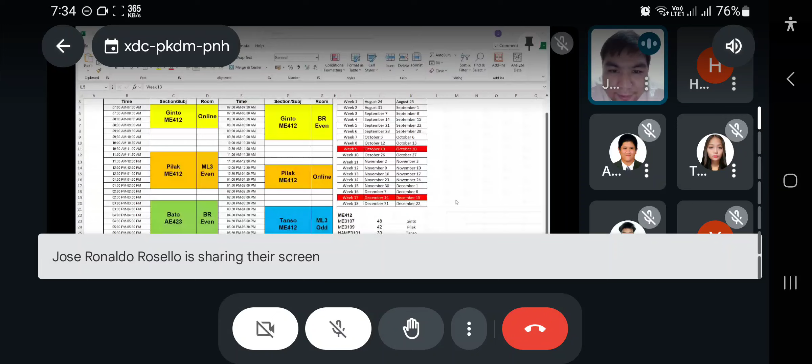Papakita ko sa inyo yung calendar ha. Ito yung plan natin. So, tatapos yung ating midterm nitong week ng 9. Pero hindi naman tayo nagklase ng 19-20. October 19 kasi nasa convention ako. October 20, sir, pahinga naman muna. Okay, 26, nag-discuss ako ng midterm sagot.

Anong ginawa pa natin? Yung design project na discussion kung paano gagawin. Then, October 27, naggawa tayo ng CAMS. Nag-discuss pa ng CAMS. So, November 2, hindi din tayo nakapag-klase. Tapos, November 3 ngayon.

Ngayon, tutuloy lang natin yung lecture nung sa CAM, kung paano mag-drawing ng CAM using graphical method. Tapos, sa November 9 is paano mag-drawing ng CAM using analytical method. So, mas mahirap itong 9, pero kaya na yun. Then sa 10 is design plate number 3 na tayo. So November 10, design plate number 3.

Then 16 saka 17 is discussion naman tayo ng gears. Tapos 23 gears pa din. Then 24 is design plate number 4 naman. Kung magdodrawing naman tayo ng gears. So, meron na tayong schedule.

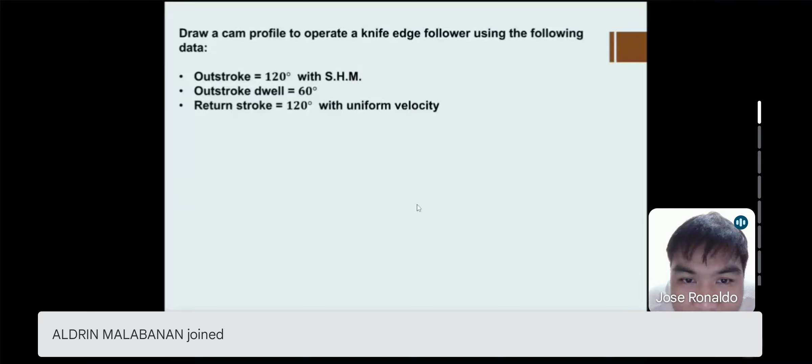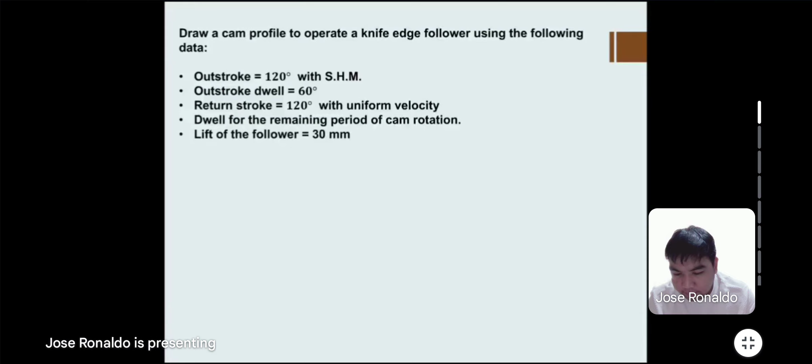Now, this second item and this fourth item, which is dwell for the remaining period of cam rotation - so what is the remaining period? We have the outstroke, which is 120 degrees, then the outstroke dwell is 60. So if you add it, you have 180, meaning we already have 180 degrees of cam rotation. Then if we add the return stroke, which is 120 also, we will have 300 degrees. So the remaining cam rotation is 60 degrees, meaning the remaining 60 degrees is how long it will dwell before it starts with the outstroke again.

So you will see again in the video later. When we say lift of the follower is 30 mm, this is the height on which the follower displaces, so this is the highest point that it will reach. Meaning, it would take 120 degrees of rotation for outstroke to reach the lift of 30 mm. Then it will take 120 degrees of return stroke to return the 30 mm going back to zero.

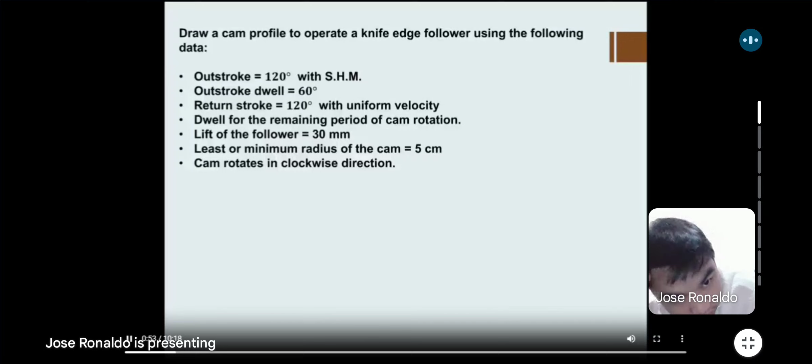Now, first we'll see how to draw the displacement diagram in this particular case. Then we'll actually construct it, and then we'll see with the help of animation how to actually construct it so that you can easily understand the given procedure.

He is calling the graph the displacement diagram, but it's the same thing as the cam displacement curve. So they're the same, it's just a different name.

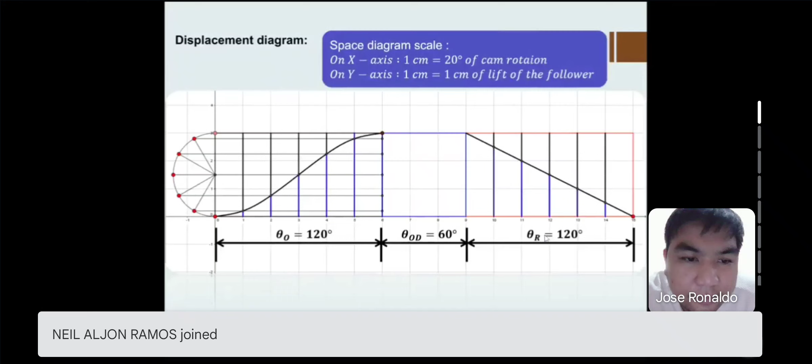Now here we have taken the space diagram scale. So on x-axis 1 centimeter is 20 degree of the cam rotation. So you can see over here the outstroke, as we have seen, it is 120. So 120 divided by this 20, it is 6 centimeter. So this particular length will be of 6 centimeter, and we have divided that into 6 equal parts.

Then the next is outstroke dwell, that is 60 degrees. So 60 again divided by this 20, that is 3 centimeter. So this length will be for 3 centimeter, as you can see over here. Similarly, this return stroke is of 120 degree. So it is 120 divided by this 20, that is 6 centimeter.

Then as this outstroke is with simple harmonic motion, we have constructed this semicircle over here, and we have divided it into 6 equal parts.

Now from point 1, draw the horizontal line. Once we have divided the semicircle into parts, we'll just make a straight line parallel to the x-axis, and the starting point is this, numbers 1, 2, 3, 4, 5, 6. From point 2 also draw the horizontal line, so that it will intersect this second line over here. From point 3 draw the horizontal line, so that it can intersect over here at this particular point, and name those particular parts.

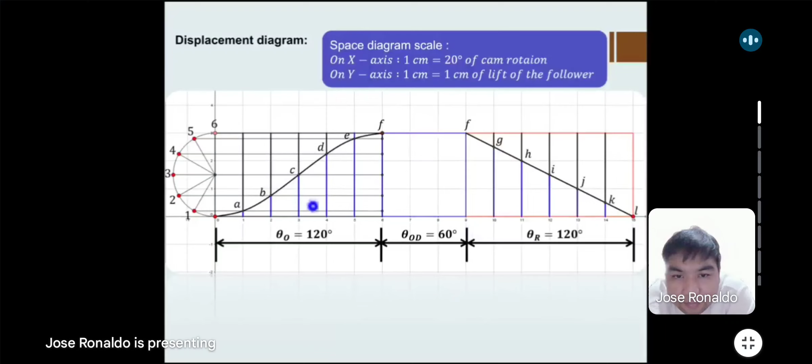Then once we measure these distances, we will transfer it to the base circle. All these distances are important for us, not only for this outstroke but also for the return stroke. Now we'll see this particular construction with the help of animation.

One more thing, that on the y-axis we are having the scale as 1 centimeter is equal to 1 centimeter of the lift of the follower. Our lift of the follower is 30 mm, that is 3 centimeter. So this vertical distance will be of 3 centimeter.

Now let us see how to construct this particular displacement diagram. We'll see the entire construction also afterwards in full animation form.

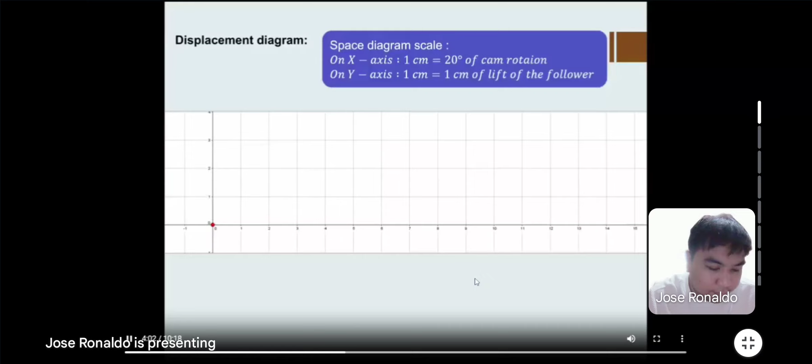As explained earlier, we are drawing this displacement diagram. This is the animation part on how it arrived, how the displacement or cam displacement curve was made. Dividing the semicircle, then drawing the vertical lines, then horizontal lines from the given particular part, and then a smooth curve passing through those intersection points of A, B, C, etc.

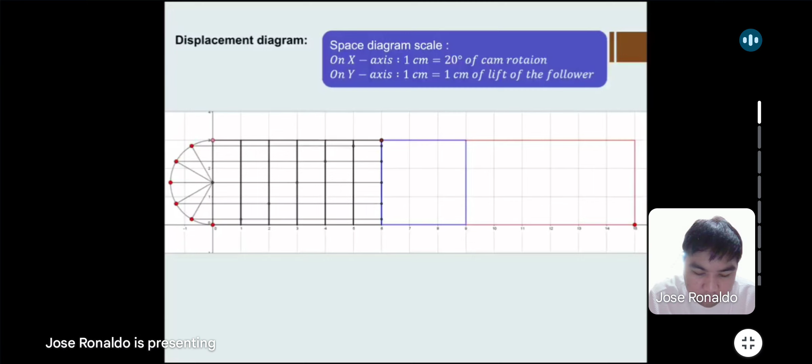Similarly, in case of the return stroke also, we'll get this type of construction. This we have already seen.

Now let us see how to draw the base circle, then once we have drawn the cam displacement curve, we will now draw this particular cam profile. We know that the least radius of the cam is 5 centimeters, so we have drawn this circle of 5 centimeters.

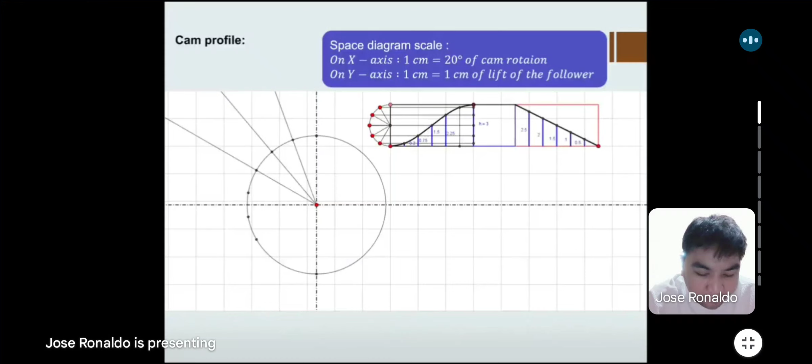Then outstroke is 120 degrees. Divide this circle into 6 equal parts as shown over here. Then, since it is given that the outstroke is 120 degrees, the starting point of the cam is the top part.

Since it is given that the outstroke is 120 degrees, starting from the starting point of the cam, we will measure 120 degrees. So this is the 120 degrees, the given drawing here.

Then, since we have divided the outstroke into six parts, we will also divide this 120 degrees into six parts during the outstroke. Then there is a dwell period. Then again divide the return stroke into 6 equal parts and draw these lines passing through this.

Now, as you can see over here, these are the distances which we have measured: 0.75, 1.5, 2.25. Those we are transferring over here on these lines, and then we are drawing a smooth curve passing through these particular points.

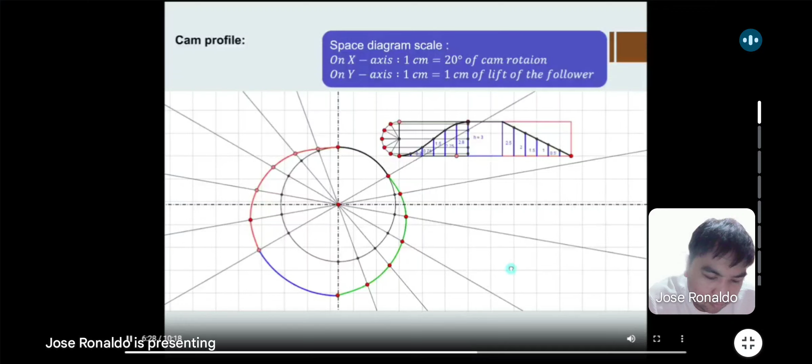Now we'll see how actually we'll draw this particular diagram. So let us start with our actual drawing of the cam profile. This is just another animation on how to draw it.

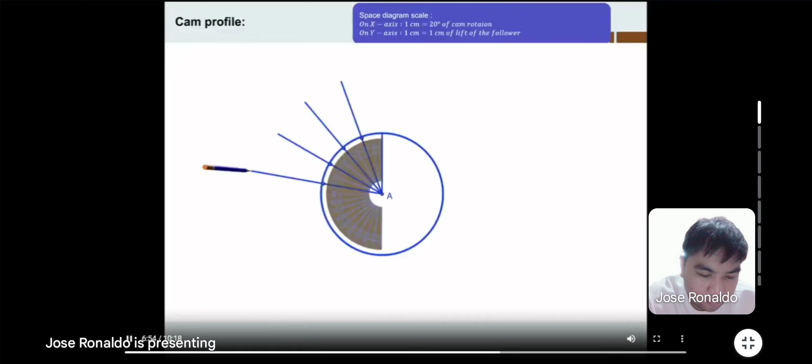As the outstroke is of 120 degrees, divide it into 6 equal parts. So we are dividing this outstroke of 120 into 6 equal parts. Then there is a dwell for 60 degrees. Again, divide the return stroke into 6 equal parts.

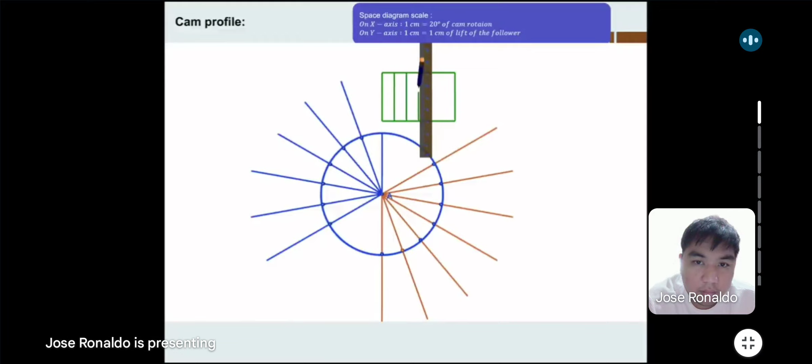Now we'll draw the displacement diagram also simultaneously over here, which we have already seen how to draw and how to measure the distances, and those distances will transfer on these particular lines. First, we'll start with the outstroke, as you can see over here.

As the outstroke is with simple harmonic motion, we'll draw the semicircle, then divide that particular semicircle into 6 equal parts -- 180 divided by 6, so 30-degree angle we have taken, so that we can divide that circle into 6 equal parts. Then locate these particular points on our semicircle.

Join this with the center. Now transfer these points on the corresponding vertical lines which we have drawn, and draw a smooth curve—that is the simple harmonic motion.

Now take the points marked on our circle and transfer the given particular distances, as you can see over here, onto those lines.

So we are marking these points of intersection with the line of this arc. This is our cam profile during the outstroke. There is a dwell for the remaining degrees.

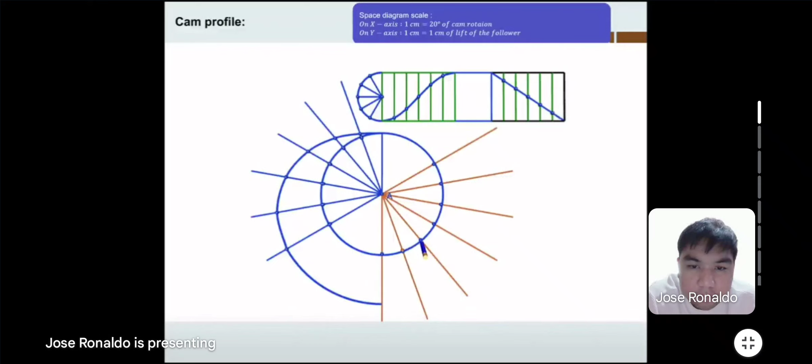So we are just marking the points on our circle. Now transfer these distances. Mark the points of intersection of this arc with these blue lines, and then draw the curve.

So this is our complete cam profile. Thank you very much for watching.

Okay, so that's how we draw the cam profile using the graphical method. I have another video here, so let's watch again.

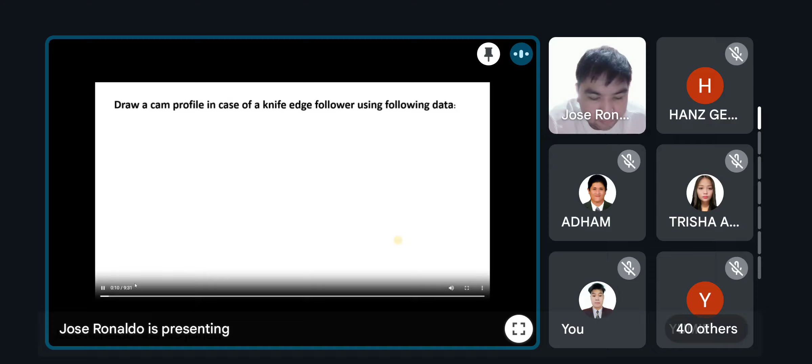To draw the cam profile, we have to draw a cam profile in case of a knife edge follower using the following data. Minimum radius of the cam is 5 centimeters. Outstroke is 120 degrees with simple harmonic motion. Outward dwell is 60 degrees. Return stroke is 120 degrees with simple harmonic motion, and dwell for the remaining period of cam rotation. Stroke or lift of the follower is given as 6 centimeters.

So the data is written over here: outstroke is 120, outstroke dwell is 60 degrees, return stroke is 120 degrees, and the remaining angle will be the return dwell, that is 360 minus the rest.

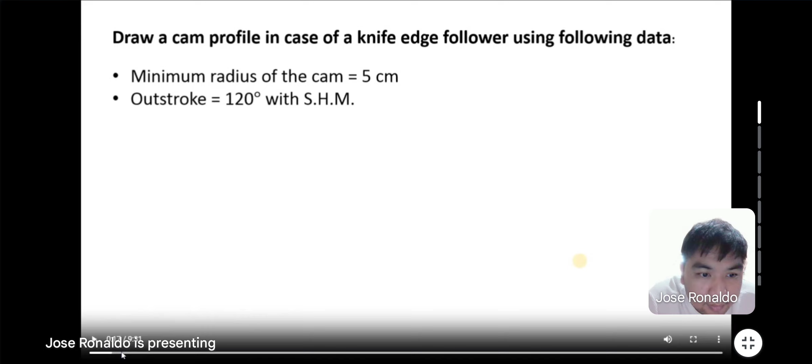So here the given data is changed a bit. For this one, we have the outstroke still 120 with simple harmonic motion, but the return stroke is also simple harmonic motion. So this is a similar case to the other one—it's just the outstroke that is different.

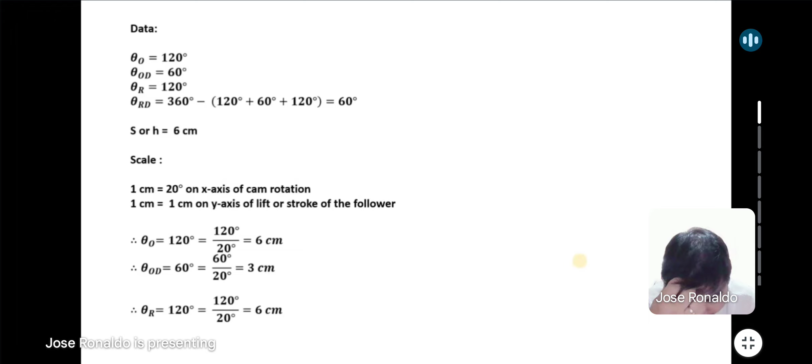Harmonic motion, and dwell for the remaining period of cam rotation. Stroke or lift of the follower is given as 6 centimeters. So the data is written over here: outstroke is 120, outstroke dwell is 60 degrees, return stroke is 120 degrees, and the remaining angle will be the return dwell, that is 360 minus the summation of these three angles—120 plus 60 plus 120—so that will be nothing but 60 degrees.

This S or H is the lift—it's just a different name again. We can use S as a replacement for displacement, or H as the height of displacement. Lift or stroke of the follower is given as 6 centimeters, and minimum radius of the cam is given as 5 centimeters.

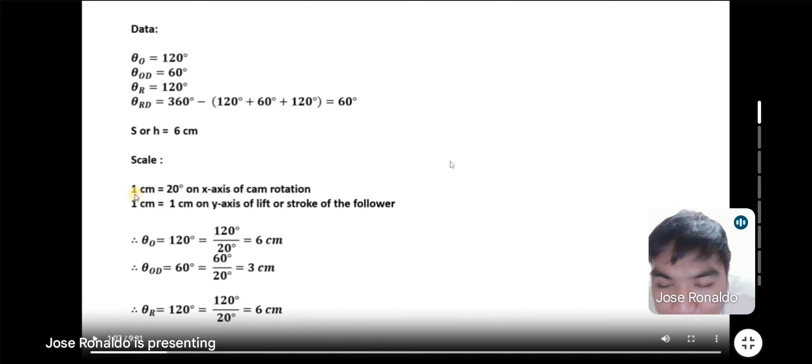Now the important part is to select the scale over here. Again, for the scale to represent the 120 degrees of outstroke, the outstroke dwell, and the return stroke, here for every 20 degrees there is 1 centimeter. This is not a fixed rule, so we can change the scale we want, but it is easier to use this one: 1 centimeter equals 20 degrees on the x-axis of cam rotation, and 1 centimeter equals 1 centimeter on the y-axis of lift or stroke of the follower.

So outstroke is equal to 120 degrees. 120 divided by the scale we have chosen, 20 degrees, gives 6 centimeters. Similarly, theta OD is equal to 60, so 60 divided by 20 degrees is 3 centimeters. And theta R, the return stroke angle, is 120 divided by 20, that is 6 centimeters. So on our displacement diagram, we represent these three angles as 6 centimeters, 3 centimeters, and 6 centimeters.

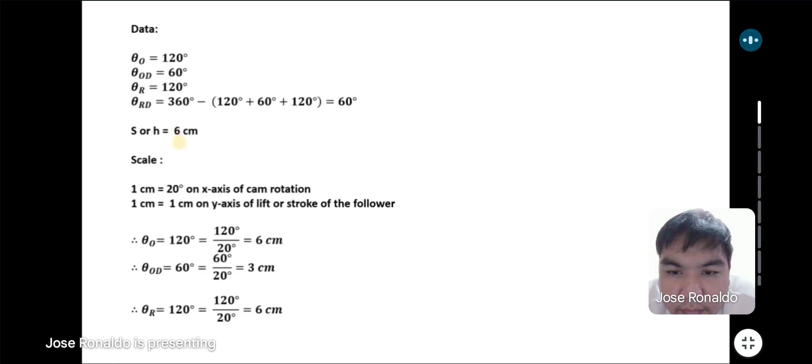Similarly, on the y-axis, 1 centimeter equals 1 centimeter. So on the y-axis, the 6 centimeter stroke will be represented by the original length of 6 centimeters. So let us first draw the displacement diagram for this.

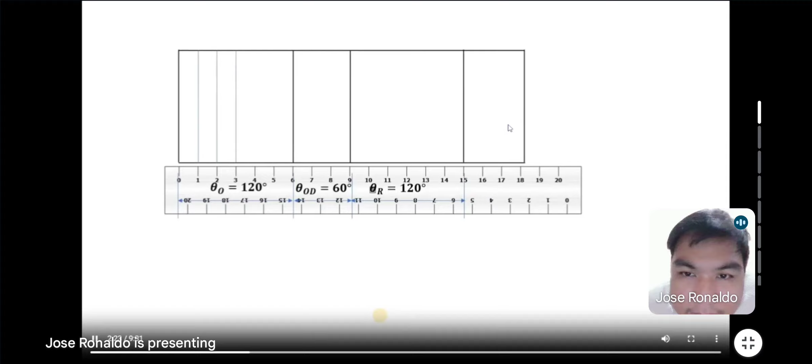Again, using the scale, we can draw the displacement diagram or the cam displacement curve. For every 1 centimeter, we have 20 degrees of rotation. The difference here is that the drawing also includes the return dwell—it is not required, but it is included anyway. So on the right side, we consider the 6 centimeter length for the outstroke, then the 3 centimeter length for the outstroke dwell, and then the 6 centimeter length for the return stroke.

So outstroke is 120 degrees, and by scale it is 6 centimeters on our displacement diagram. Outstroke dwell is 60 degrees, which is 3 centimeters on our displacement diagram. Return stroke is 120, divided by 20, that is 6 centimeters on our displacement diagram. We are not considering the return dwell part over here.

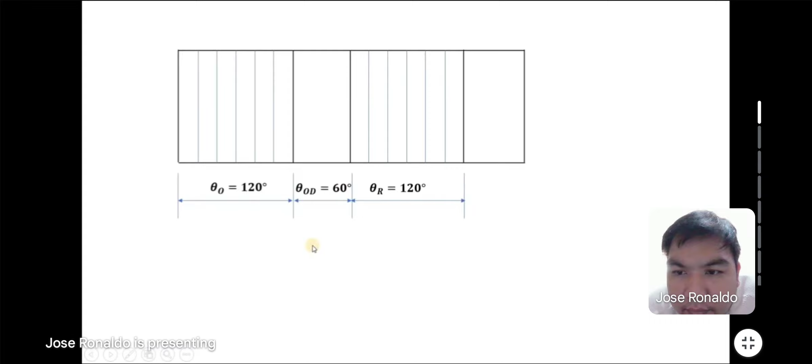We are concentrating only on these three angles for drawing the displacement diagram. Now we'll draw the center line. Since it is simple harmonic motion, we'll divide this semicircle into six equal parts, so 180 divided by 6 is 30 degrees. We have marked the angles. For simple harmonic motion, we divide the semicircle into parts, so if we divide it into 6 parts, the displacement diagram should also be divided into 6 parts.

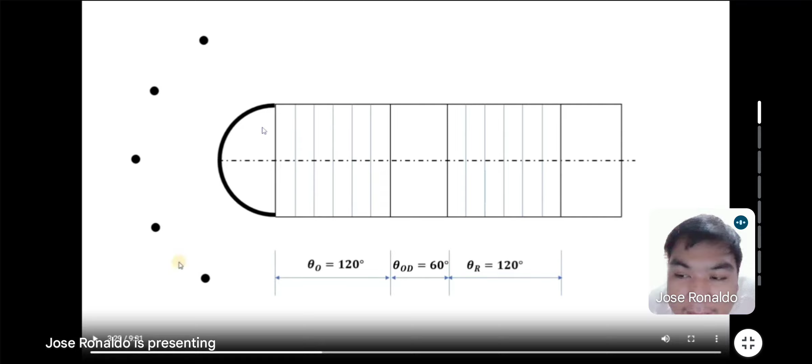Now draw the lines passing through this, then mark this 1, 2, 3, 4, 5, and 6. Draw the horizontal line from this one till it intersects this vertical line from 1 at this particular point. Similarly, draw a horizontal line from 2 till it intersects this vertical line from 2 at this particular point. Same procedure we have to draw for line from 3 till it intersects this vertical line from 3 and so on.

Now we have to join these points by a smooth curve. So this is the simple harmonic motion curve that we have obtained for theta O equal to 120 degrees.

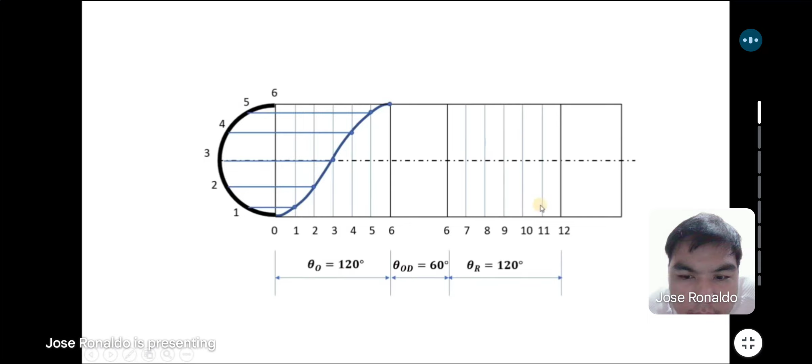Now, as both the outstroke and return stroke are simple harmonic motion, we can translate these points on the return side also. So as you can see over here, since the return stroke is also simple harmonic motion, we are just copying the points to the return stroke coming from the outstroke. Same points will be there for the return stroke also.

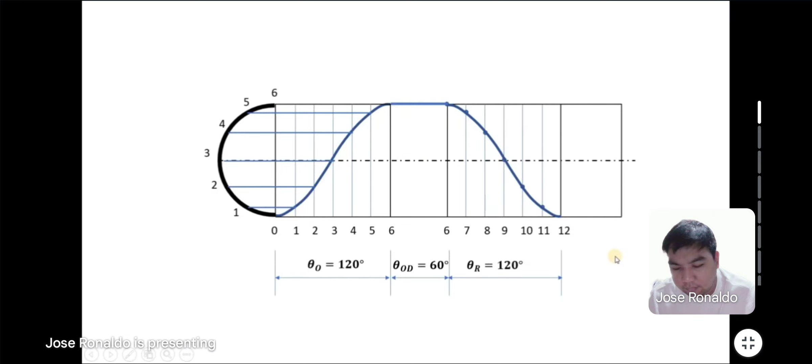And then join a smooth curve from this point. So this is the curve for return stroke, and then this is the dwell. So we have completed the displacement diagram in case of this particular problem.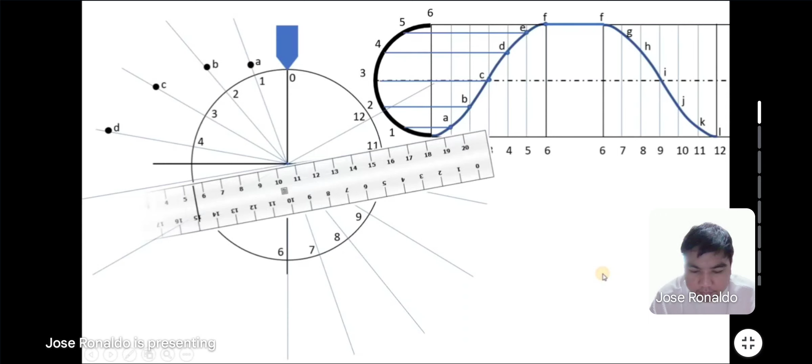Similarly, this 3 and C distance, that is 3 centimeters, we are marking over here. That is 3C distance. Similarly, for 4D, then for 5E, and then for this 6F.

Similarly, this 6F will be drawn on the return stroke lines also. So all these points are drawn. So it is 6F, then 7G, 8H. All these lines 6F, 7G, 8H, these distances are transferred over here on the corresponding lines.

Now we have to draw a smooth curve passing through these points, and that will be our cam profile.

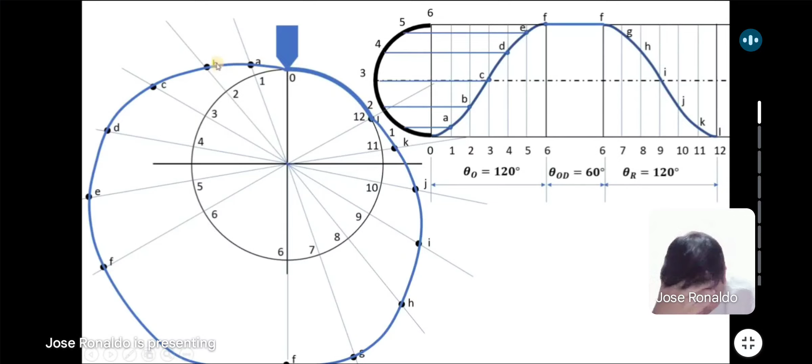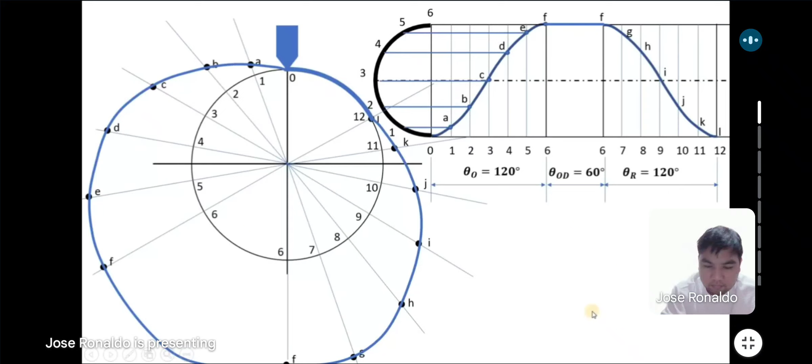Okay, again, so that's the design of the cam profile using simple harmonic motion. That's the easy part, drawing the cam profile when the follower is reciprocating.

So if the follower is oscillating, it is much more challenging than the reciprocating case. For the oscillating part, we have to consider the length of the arm and the distance of the pivot of the oscillating arm. I'll just give you an overview of how to design this, but this is a hard one compared with the others.

In this video, we'll see how to draw a cam profile in the case of an oscillating roller follower. So let us start with the problem statement: we have to draw a cam profile to drive an oscillating roller follower with the following specifications.

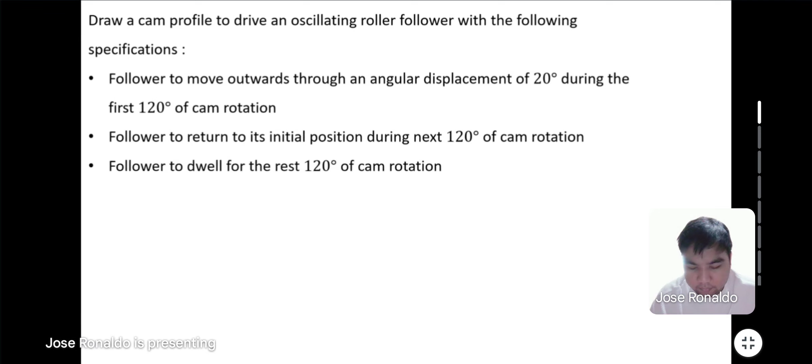Follower to move outward through an angular displacement of 20 degrees during the first 120 degrees of cam rotation. Follower to return to its initial position during the next 120 degrees of cam rotation. Follower to dwell for the rest of the 120 degrees of cam rotation. The distance between the pivot center and roller center is 120 mm. The distance between the pivot center and cam axis is 130 mm. Minimum radius of the cam is 40 mm. Roller radius is 10 mm. Outstroke and instroke both take place with simple harmonic motion.

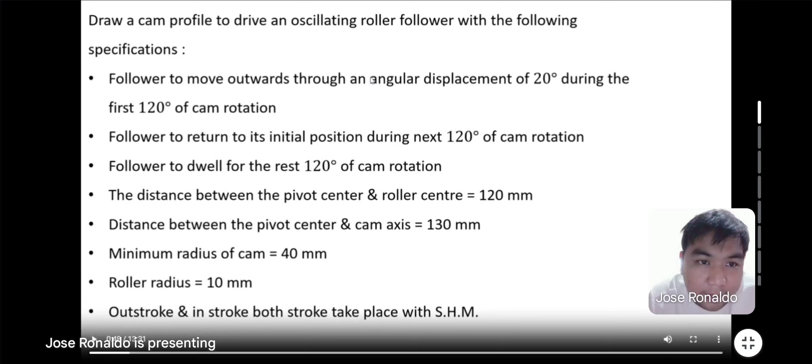Okay, let's analyze the given data first. The follower moves outward through an angular displacement of 20 degrees during the first 120 degrees of cam rotation. Since the follower is oscillating, the given displacement is 20 degrees. Again, an oscillating motion is a back and forth motion on an angle, so the angle it makes is 20 degrees, and it can make this 20 degrees of travel during the 120-degree cam rotation.

Then the follower will return to its position during the next 120 degrees, meaning there is no outstroke dwell. Once it has reached the 120 degrees, it will now return to its original position for the succeeding 120 degrees. Then once it has returned to its original position, it will dwell for the remaining 120 degrees of rotation.

Another given here is the distance between the pivot center and the roller center. Since this is a roller follower, we will have a prime circle. The pivot center is the joint connected to the ground, and this 120 mm is the distance from that joint to the center of the roller. Then the distance between the pivot center and the cam axis - when we say cam axis, it is the center of the base circle - the given distance from the pivot of the follower to the center of the cam is 130 mm.

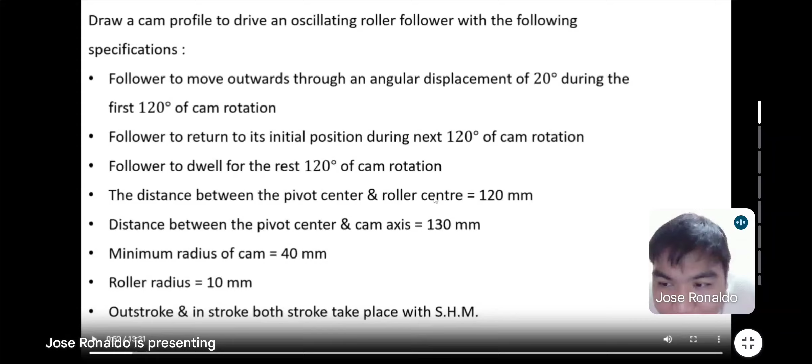Again, the given angle is 20 degrees, and this 20 degrees is the travel of the follower. This arc can be computed using radius times the angle in radians. So 20 degrees in radians times the radius, which is given as 120 mm. Let's convert 20 degrees into radians by multiplying it by pi over 180. Then multiply it with the radius, and we will have the displacement, rounded off to the whole number, which we will use as the y-axis.

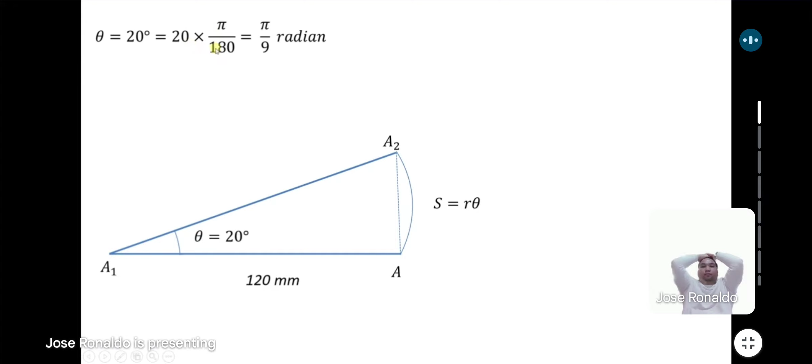Oscillation of the follower is given as 20 degrees, so convert that value into radians. We multiply it by 20 into pi by 180, that is pi by 9 radians. Now A1A2 is the distance between the pivot center and roller center. A2 is the roller center and A1 is the pivot center, and that distance is given as 120 mm, so this is our radius.

Then arc AA2: we know that arc S is equal to r theta. So radius is 120 and theta is pi by 9. After multiplying the radius with the angle in radians, we will have 42 mm. So we will use 42 mm on the cam displacement curve on the y-axis.

I'll repeat this procedure. For an oscillating follower, it is a back and forth motion on an angle, and the given angle is 20 degrees. It is given that the distance between the pivot and the roller center is 120 mm, so we can use this as a radius. To compute the linear displacement S, we multiply the radius or distance between the pivot and roller center by the angle in radians. That's why this 20 degrees is first converted into radian form by multiplying by pi over 180.

Then we multiply this pi over 9 into 120. The answer has a decimal, so we round it into whole numbers, giving 42 mm, which is what we will use on the y-axis for the cam displacement curve. 120 into pi by 9 comes out to be 41.887, or nearly 42 mm. This arc distance will approximately equal the vertical distance, so we can say the lift of the follower is 42 mm when drawing the displacement diagram.

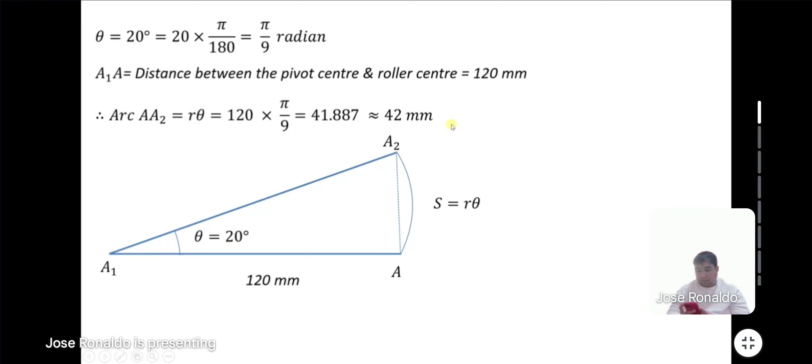Now theta outstroke is given as 120 degrees with simple harmonic motion. Return stroke is also 120 degrees with simple harmonic motion. Then return dwell is also 120 degrees. Minimum radius of the cam is 40 mm, then radius of the roller is 10 mm. Therefore prime circle radius will be equal to 40 plus 10, that is 50 mm. Convert these values into centimeters, so it is 5 centimeters.

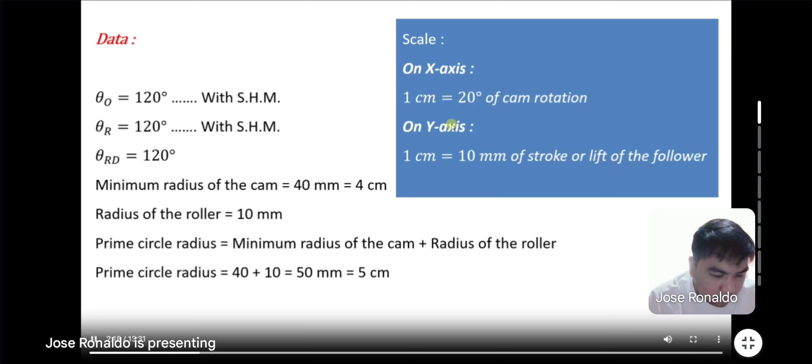Now we'll take into consideration the scale, which is very important. On the x-axis, we have a scale of 1 centimeter equals 20 degrees of cam rotation. Again, this is not a rule, it is just convenient to use this, so we can use it. Then minimum radius of cam is 4 centimeters, which we can use as a base circle, and since we have a roller radius, we will have a prime circle.

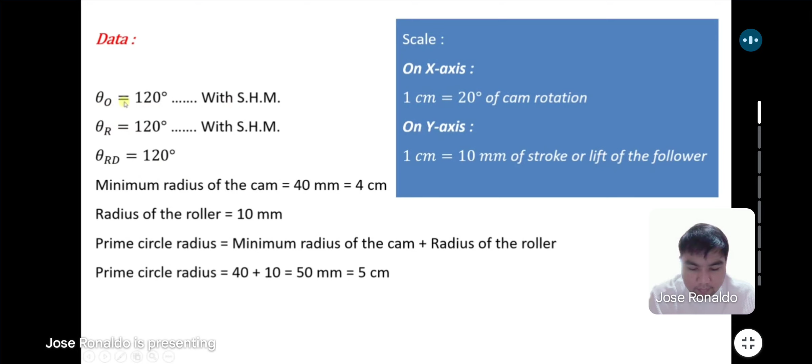On the y-axis, we will take 1 centimeter equals 10 mm of stroke or lift of the follower. So 120 divided by 20 is 6 centimeters, so theta outstroke will be 6 centimeters. Similarly, theta return stroke is also 120 divided by 20, that is 6 centimeters, and theta return dwell is also 6 centimeters. So total will be 18 centimeters, out of which outstroke and return stroke are important for us while drawing the displacement diagram. First we'll mark the length of 18 centimeters, then divide the outstroke and return stroke into 6 equal parts as shown here.

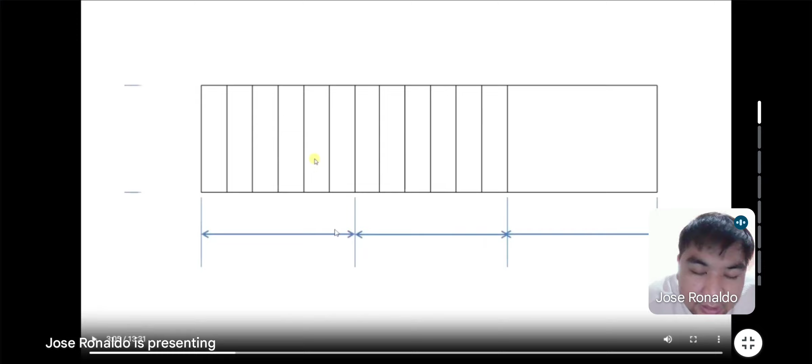So for the cam displacement curve part, since the given is 120 degrees on the outstroke, the representation of that will be 6 centimeters. As you can see, the lift of the follower is 42mm. The earlier computed 42mm will be placed on the y-axis.

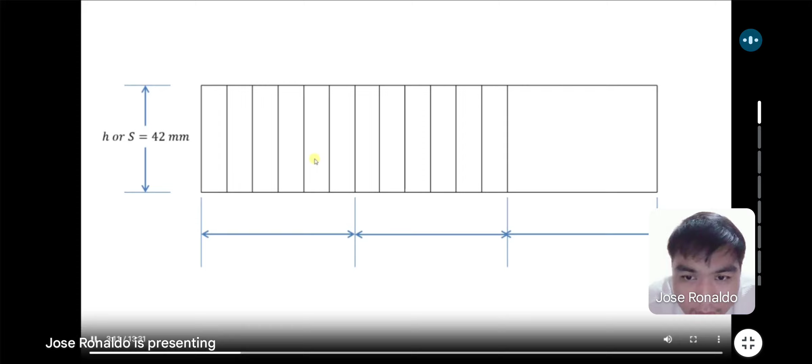For the x-axis, the arc distance which we have approximately converted into vertical displacement using the scale: outstroke of 120 degrees is 6 centimeters, return stroke 120 degrees is also 6 centimeters, and dwell is also 6 centimeters. All of them are 6 centimeters by scale, and we have divided that 6 centimeter into 6 equal parts.

Now since the motion is simple harmonic motion, we'll draw a semicircle. Again, for simple harmonic motion, we will draw the semicircle first, then divide it into parts. Since we have divided the outstroke into 6 parts, we will also divide the semicircle into 6 parts.

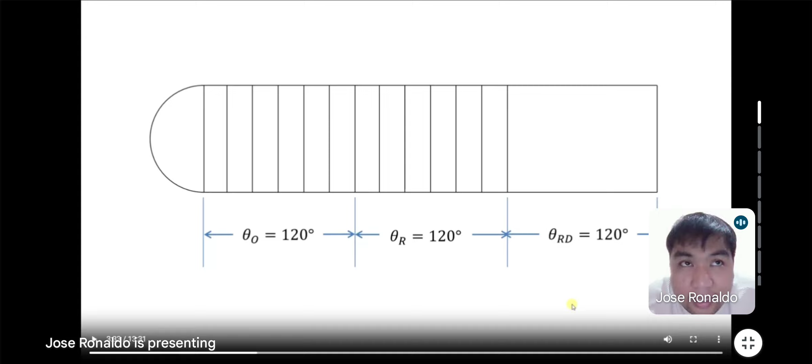For this cam displacement curve, it is not required to draw the return dwell. But for clarity, they have drawn the return dwell here. Technically, we can choose not to draw the return dwell.

Of radius 42 divided by 2, that is 21, that is 2.1 centimeter.

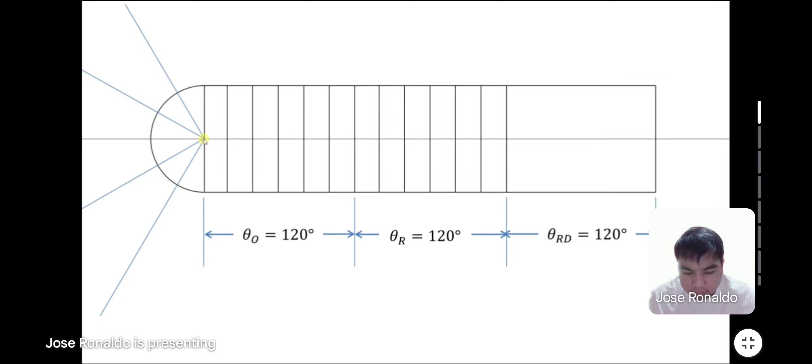Now we have to divide this semicircle into 6 equal parts. So 180 divided by 6 is 30 degrees. We'll draw lines of 30 degrees, as you can see, and then mark these points: 0, 1, 2, 3, 4, 5 and 6. So we have divided this semicircle into 6 equal parts.

Now we have to draw projections from point 1, 2, then 3, 4, 5, like that. The projection drawn from 1 will intersect this vertical line at this point, and similarly it will intersect the 11th vertical line at this point. From 2, it will intersect over here, and similarly it will intersect the 10th point.

Since the motion is simple harmonic motion for both outstroke and return stroke, we have extended this point on the return side also. This third projection will intersect this vertical line at point 3, and it will also intersect the ninth vertical line from 9 at this point, and so on. Look at these points and draw a smooth curve passing through them.

So this is the rise and this is the return stroke. This is the outstroke motion with simple harmonic motion, then the return motion during the return stroke also using simple harmonic motion.

Again, since there is no given outstroke dwell, after the outstroke it will proceed directly into the return stroke.

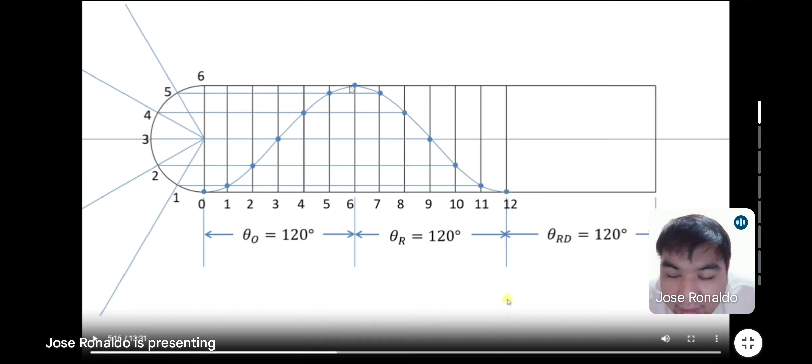Now for us, these points A, B, C, D, E, F, G, H, I, J, K are important. So first we'll measure distances 1A, 2B, 3C, 4D, 5E, 6F, then 7G, 8H, 9I, 10J and 11K distances.

Now as you can see, 1A distance will be the same as 11K, then 2B distance will be the same as 10J, 3C will be the same as 9I, and so on. So let us measure those distances first.

So 1A distance comes out to be approximately 0.3 centimeter, then 2B distance is 1 centimeter, 3C distance is 2.1 centimeter, then 4D is 3.1 centimeter, 5E is 3.8, and 6F is 4.2 centimeter.

These measurements will be transferred into the prime circle, not the base circle, because we have a roller radius. So using these distances, now we have to draw the cam profile.

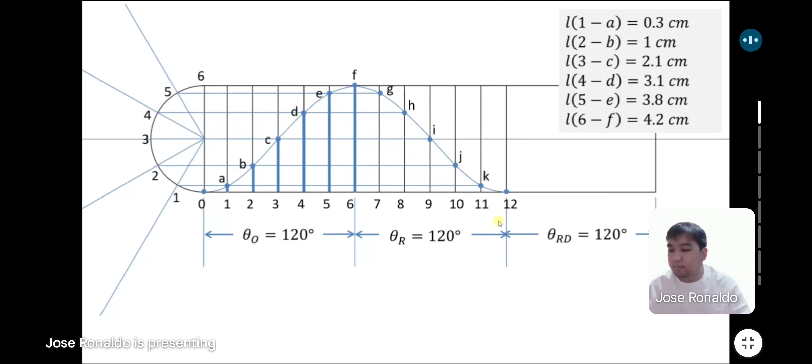First we'll draw the base circle, which is of 4 centimeters. The minimum radius of the cam is given as 4 centimeters, so we have taken a radius of 4 centimeters. This is the hard part again.

For this one we have to first draw the base circle, which is this big circle here in the middle. Then we have to draw the prime circle, which is the outer circle here.

Then we have to draw the distance of the pivot going into the roller, which is 120mm—shown as the straight line horizontal here on the upper side. Then it's also given that the distance of the pivot with the cam axis, which is the cam center, is 130mm. So this diagonal here is 130mm.

Okay, so again, first let's draw the base circle, which is given as 4 centimeters. Then we have to draw the prime circle, given that the roller radius is 10mm, so we can draw the outer circle or the prime circle.

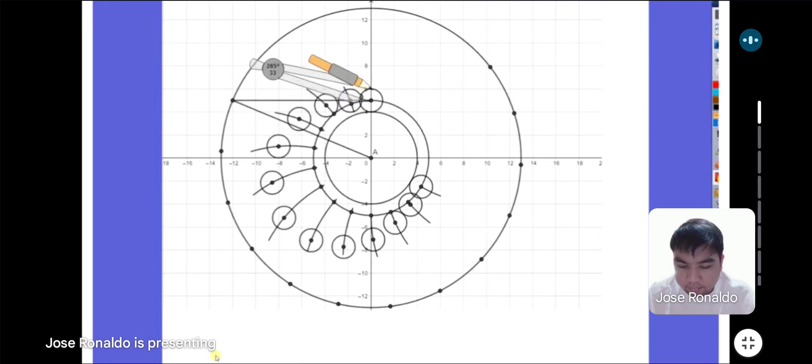Now we know that the distance between the pivot center and the roller center is 12 centimeter. So we have to choose the radius of 12 centimeter and draw an arc. Let us do that over here. We'll take a radius of 12 centimeter and draw an arc so that it will intersect this pivot circle, the 13 centimeter radius circle, at a certain point.

So that is also shown in the procedure. You can see this is the point, so this is the pivot center. The pivot center is joined here with the roller center, and the pivot center is now joined here with the cam axis center, or cam center. This will complete our first part.

Now we have to divide this pivot circle into 6 equal parts. 120 divided by 6 is 20 degrees, so these are all 20-degree angles. Outstroke is divided into 6 equal parts and return stroke is also divided into 6 equal parts of 20 degrees, because outstroke is 120 and return stroke is also 120. So this is 1, 2, 3, 4, 5, 6, 7, 8, 9, 10, 11 and 12 parts, inclusive of outstroke and return stroke.

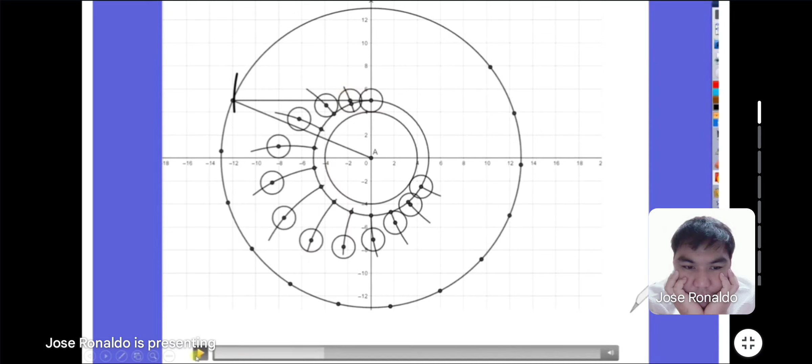Now from point 1, we have to draw an arc of 12 centimeter on this prime circle. That procedure will be shown here. Taking this as a center and radius equal to 12 centimeter, we draw an arc of 12 centimeter on the prime circle. So this is the 12 centimeter radius point, and we draw the arc as shown in the animation. This is our first arc.

Then taking point 2, draw another arc of the same radius, that is 12 centimeter. That also we have shown here.

Put this over here at the third part and draw the arc, then the fourth point and draw the arc again, and so on. We mark these arcs continuously from their respective points, so you can easily understand this procedure.

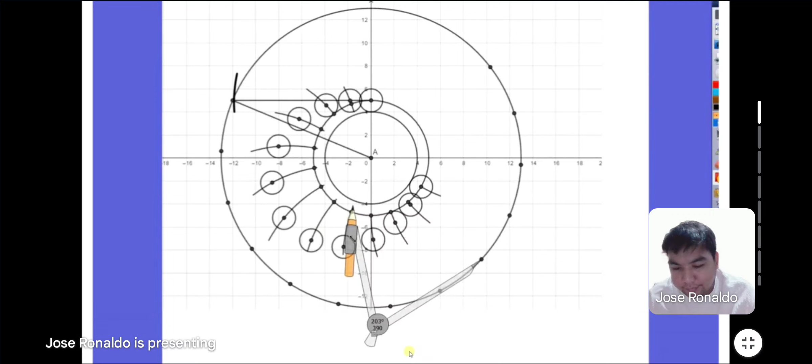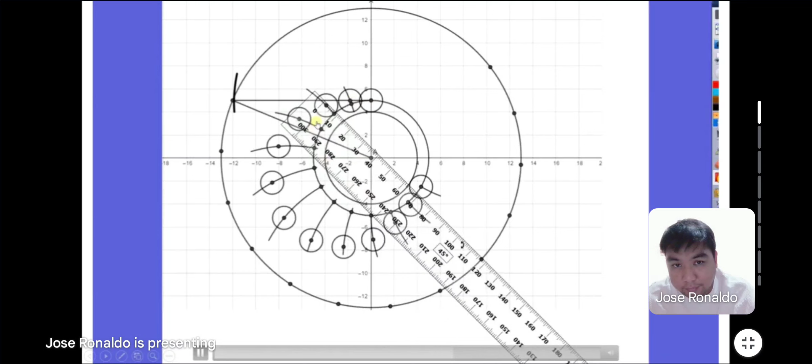Now using those points, 1A, 2B, with A as center and taking the roller radius, we draw the roller. Once we've transferred the distances into this arc and marked the endpoints, we draw the rollers. Once drawn, we will trace the cam profile.

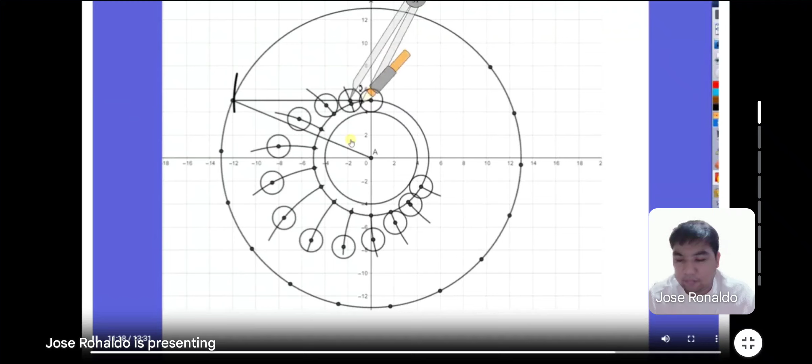Rollers over here like this. Then taking B as center, we draw a circle like this. Then taking C as center, we draw the roller radius, and so on. We can go on drawing this radius.

So once again this is 1A, 2B, 3C, 4D and the other distances. We have marked all this and drawn this roller from the respective points till the end. Let us now repeat this procedure in our next animation.

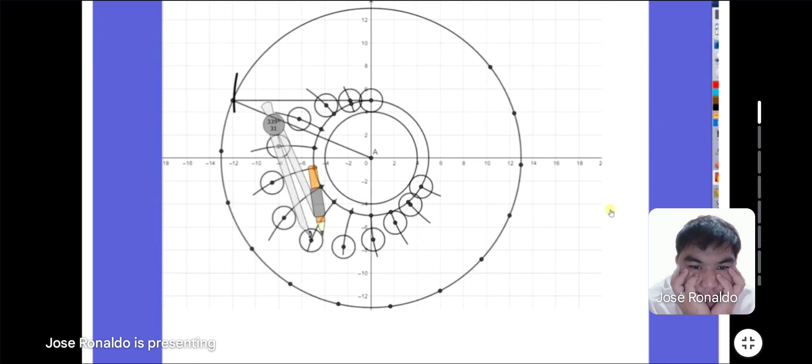As we discussed earlier, we have drawn the given particular setup. Once we've drawn the rollers on the centers here, we will trace the cam profile. This is O, A1, A - O is the cam center, this is the roller center, and A1 is the pivot center.

These are the 12 parts we made of 20 degrees each for outstroke and return stroke. With 1 as center and arc distance equal to A1, that is 12 centimeters, we drew the arcs. Then we transferred the distances 1A, 2B, 3C, 4D, 5E, 6F, 7G, 8H, 9I, 10J, 11K and so on. With A as center we drew these rollers, with B as center we drew the roller of 1 centimeter radius, and so on. Now we'll draw a smooth curve - this is the cam profile.

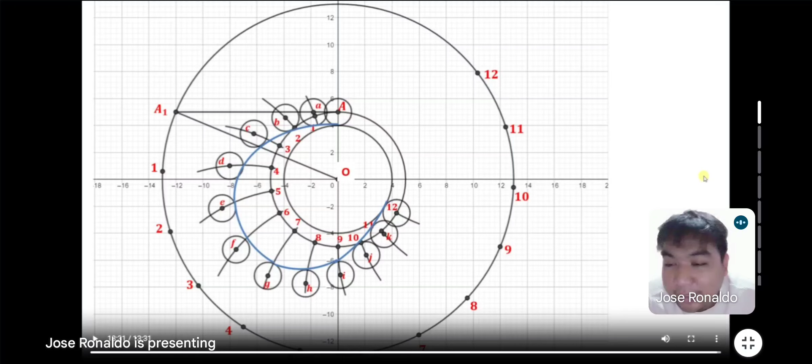Again, this is a hard one when drawing the cam profile for oscillating followers. This is very challenging in comparison with reciprocating followers.

Then I have one last video. I have given you samples on how to draw the cam profile. For reciprocating followers, we have knife and roller followers. For the flat-faced follower, it's the same method as the knife type method, so it's just the same. The only difference is the roller, because it has a prime circle - only the roller follower has the prime circle. So I've given you examples for inline reciprocating.

For the last video, the last lecture or example, we will now see how to draw an offset type of follower. First, we will see how the cam profile is drawn while it is inline, then we will see how it will be drawn if it is offset. So for the offset, we will have a different approach.

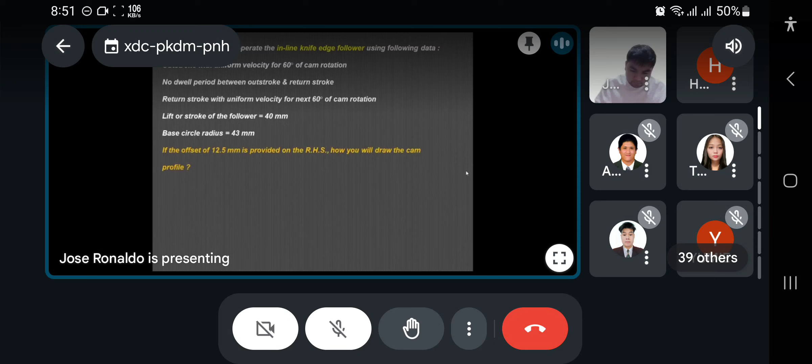Now if there is an offset provided on the right hand side of 12.5 mm, then how will you draw the cam profile? This is the important part in this particular case.

So there are two cases. First, we'll draw the cam profile in case of inline knife edge follower, and then for the offset follower.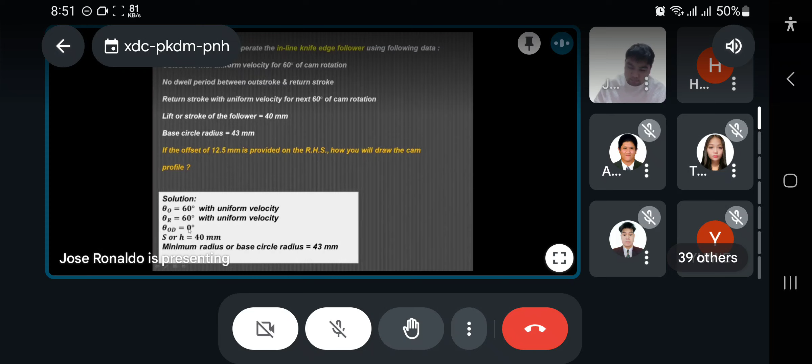Now the data given is: outstroke is 60 degrees, there is no dwell between outstroke and return stroke, so return stroke is 60 degrees. Outstroke dwell is 0, then return dwell will be 360 minus the summation of these. But this is of no use for us while drawing the displacement or the cam profile.

Lift or stroke of the follower is 40 mm or 4 centimeters. Minimum radius or base circle radius is 43 mm. And offset of 12.5 mm is provided on the right hand side.

Now let us choose the scale for this. On x-axis we have 1 centimeter equal to 10 degrees of cam rotation. On y-axis we have 1 centimeter equal to 10 mm of lift or stroke of the follower.

Now as the outstroke is given as 60 degrees, 60 divided by the scale we have chosen, which is 10, equals 6 centimeters. So we are going to draw outstroke with 6 centimeters.

So for this example, let's go back with the given data. We have a knife edge follower type with outstroke with uniform velocity. So just a simple diagonal on the cam displacement curve for 60 degrees.

There is no dwell. Then the return stroke is also 60 degrees. Then the lift, which is the y-axis, is 40 mm. The base circle radius is 43 mm, so we can draw the base circle here.

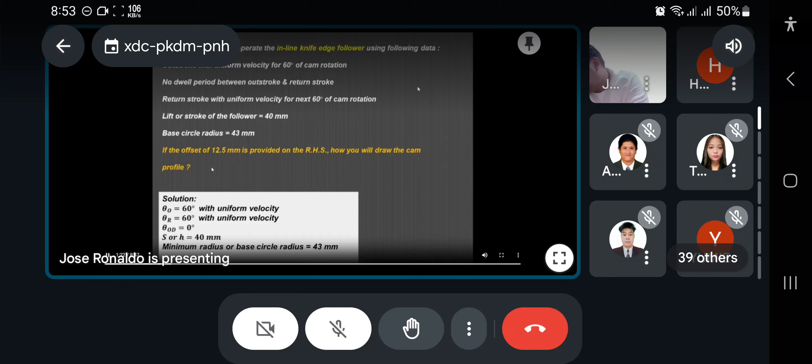Lift or stroke of the follower is 40 mm or 4 centimeters. Minimum radius or base circle radius is 43 mm. And offset of 12.5 mm is provided on the right hand side.

Now let us choose the scale for this. On x-axis, this one is different because we usually use 1 centimeter is to 20 degrees. But since the outstroke is only 60 degrees, the scale is changed into 1 centimeter is to 10 degrees. Again, since scale is something we decide as designers, it will depend on the situation.

1 centimeter is equal to 10 degrees of cam rotation. On y-axis, 1 centimeter is equal to 10 mm of lift or stroke of the follower. Now as the outstroke is given as 60 degrees, 60 divided by the scale of 10 is 6 centimeters. So we are going to draw outstroke with 6 centimeters on the displacement diagram.

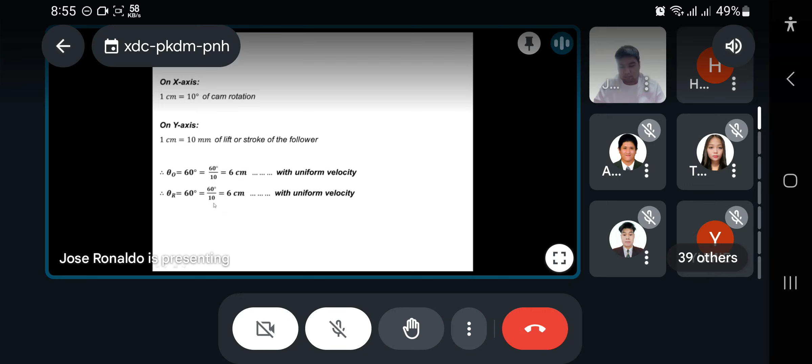Similarly, return stroke also of 60 divided by 10, that is 6 centimeters. And lift or height of the follower is 40 mm on y-axis. 40 divided by scale of 10 is 4 centimeters on y-axis.

Now let us start with our displacement diagram. First we'll draw 6 centimeter length and immediately 6 centimeter length for the return stroke, and the remaining is the return dwell, which is of no use. Then we'll divide this outstroke into 6 equal parts as shown, and return stroke also into 6 equal parts. The lift or height of the follower is 4 centimeters as shown in the diagram, so vertical height is 4 centimeters.

Now outstroke is taking place with uniform velocity, so we have to draw this diagonal, and return stroke is also of uniform velocity. So mark the various parts we have made. We have divided outstroke into 6 equal parts, and similarly return stroke also into 6 equal parts.

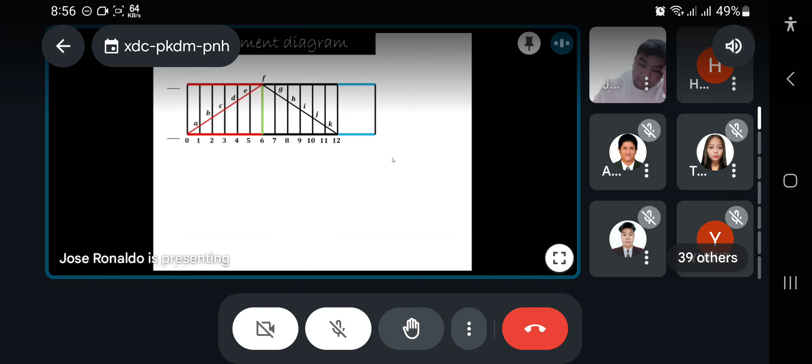Now the vertical lines will intersect at A, B, C, D, E, F and so on. Vertical line from 1 will intersect this uniform velocity curve at point A, 2 at point B, 3 at point C, and so on. So all these distances, 1A, 2B, 3C, 4D, 5E, 6F, 7G, 8H, 9I, 10J, 11K, are important for drawing the cam profile.

Let us start with our first part, the inline knife edge follower. To see the difference between inline and offset, we will first design the inline type of follower.

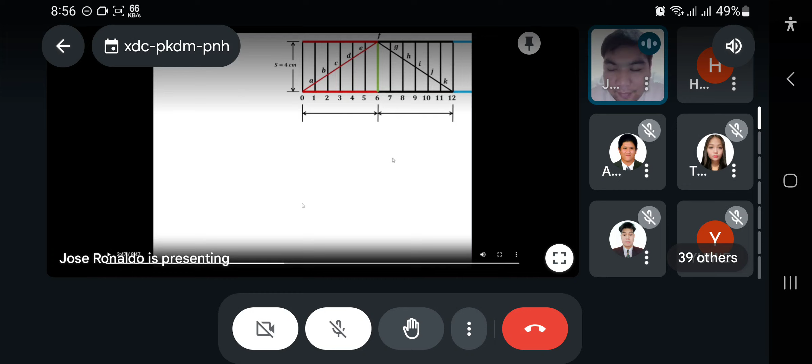So we'll draw the center line as indicated, then the minimum radius of 43 mm or 4.3 centimeters.

The outstroke is 60 degrees and it is converted into 6 parts on the displacement diagram, so 60 divided by 6 is 10 degrees. We'll mark and divide the outstroke of 60 degrees into 6 parts of 10 degrees each. Similarly, the return stroke is also 60 degrees, so 60 divided by 6 is again 10 degrees. Total is 120 degrees, that is 12 equal parts we have to make.

As you can see, we have done the 12 equal parts of 10 degrees each, 60 degrees for the outstroke and 60 degrees for the return stroke.

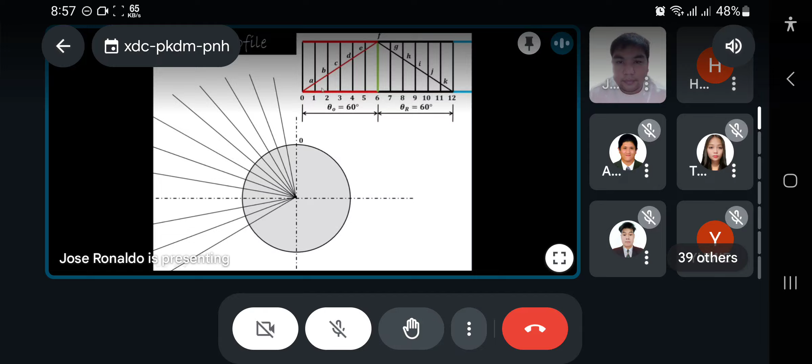Now we have to transfer these distances, 1A, 2B, 3C, as you can see these red lines appearing. Measure 4D, 5E, 6F, similarly 7G, 8H, 9I, 10J and 11K, and transfer these particular distances.

So 1A distance is transferred over here on the first line. Similarly 2B, 3C, 4D, 5E, 6F, 7G, 8H, 9I, 10J and 11K are all transferred over here. These are nothing but our points A, B, C, D, E, F, G. Then we have to draw a smooth curve passing through them. This is nothing but our cam profile in case of the inline knife edge follower.

Now for the offset follower, we have to be very careful. First we'll draw the base circle of 43 mm or 4.3 centimeters. Okay, so this is what it looks like for the inline type for this cam displacement curve.

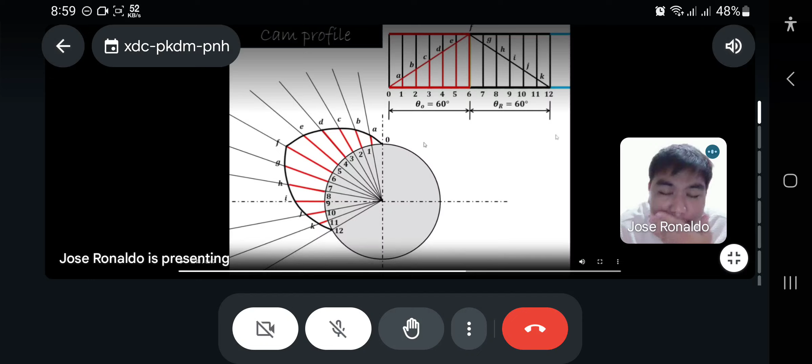Now we will see how to draw the cam profile if the follower is offset. For this example, when designing the cam profile for inline and offset, the cam displacement curve is the same, meaning this cam displacement curve we made earlier is used regardless of whether it is inline or offset.

We have to be very careful. First, given here is that the center line of the follower is offset 12.5 millimeters on the right hand side, meaning from the center of the base circle. To make it an easier reference, we will make a small circle inside the base circle having a radius of 12.5, along with the base circle of 43 mm or 4.3 centimeters.

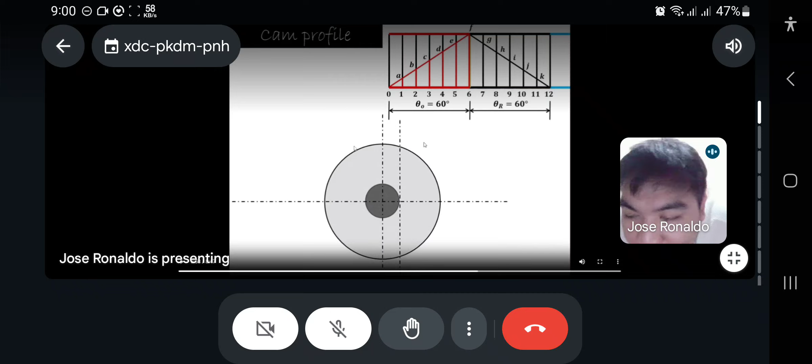Then there is an offset of 12.5 on the right hand side. So draw a vertical line, this is the 12.5 offset from the center line, meaning the follower will start on this line instead of the usual middle one, as you can see, wherever it cuts the base circle.

Then at the intersection of the base circle and this offset line, we will connect a radius, and this radius will be our starting position. From that particular point, you have to join it with the center of this particular base circle.

Construct a knife edge over here along with the guides. So this will start with the knife edge follower with guides. The guides represent the frame or the ground, and the knife edge follower slides along it.

Then this diagonal reference is from which angles are to be marked, so the 60 degrees of the outstroke will be measured starting with this line. In the past examples, we started the outstroke from the y-axis, but for this offset, we will start the 60 degrees using this line.

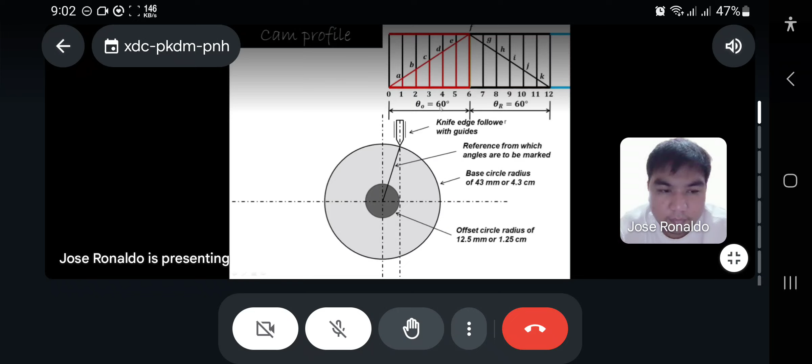First, 60 degrees divided by 6, that is 10 degrees. We'll divide this 60 degree into 6 parts of 10 degree each. Similarly, the return stroke is also 60 degrees, divided into 6 equal parts of 10 degrees. So total will be 60 plus 60, that is 120, and 120 divided by 12 is 10 degrees. So we'll divide this into 12 parts of 10 degree each.

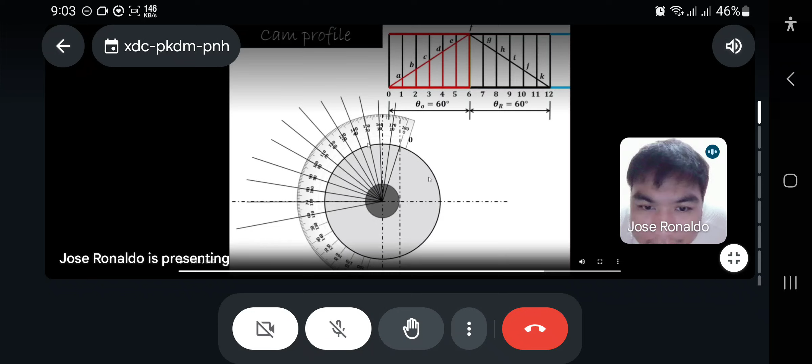Let's mark the 60 degrees of outstroke and 60 degrees of return stroke, dividing this as shown, first 60 degree for the outstroke and remaining for the return stroke. With this example, we can already see that it is very different from the other one, as this has its starting point at a different location for the return stroke.

Now we mark this particular point: 1, 2, 3, 4, 5, and 6. These first 6 parts are for the outstroke, and the remaining 6 parts from 7 to 12 are for the return stroke.

Then, to transfer the distances we made on the cam displacement curve, it is not as simple as what we did earlier. Earlier, from the divisions of these lines, we just extended based on the measurement on the cam displacement curve. But here on the offset, we will make tangent lines. So for the numbered points 1 to 12, we connect each to the offset circle using a line that is tangent to the offset circle. Then this tangent line is where we add the measurements from the cam displacement curve.

Again, transferring the measurement from the cam displacement curve to the cam profile is not as simple as before, where we just put distances on the division lines and traced them to get the cam profile. Here on the offset, what we will do is make tangent lines from the numbered points going to the offset circle, then this tangent line is where we add the distances from the cam displacement curve.

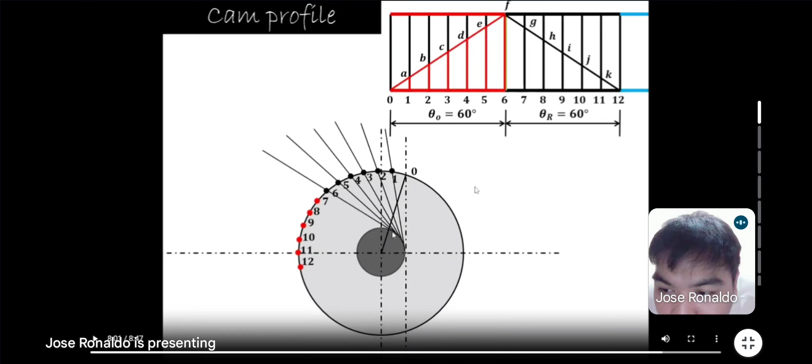This tangent line is where we add the distances measured from the cam displacement curve, like this. Then we transfer the distances: 1a distance transferred over here, then 2b, 3c, 4d, 5e, 6f, 7g, 8h, 9i, 10j and 11k. All these distances are now transferred over here. Measure distance 1a, transfer it, then 2b distance, also transferred. Now draw a smooth curve passing through points a, b, c, d, e, f, g up to k.

This is the cam profile in the case of the offset knife edge follower. So in this way we can draw the cam profile for the offset follower. Thank you very much for watching.

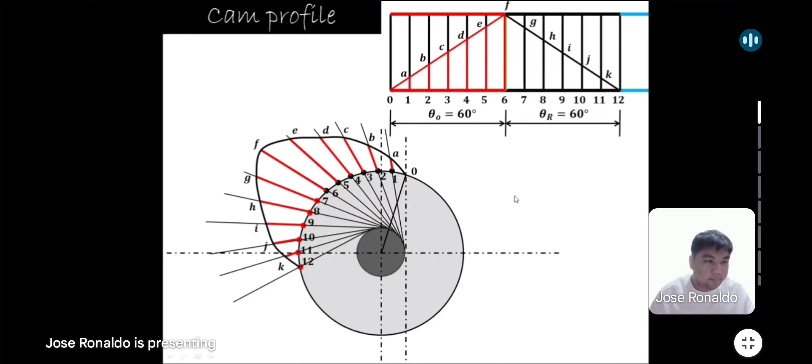That's the different methods or approaches in designing the cam profile. These videos and the presentation I made for the discussion of cam are already uploaded in our Google Classroom, because on design plate number 3, we will be drawing a cam profile for a roller follower with offset installation.